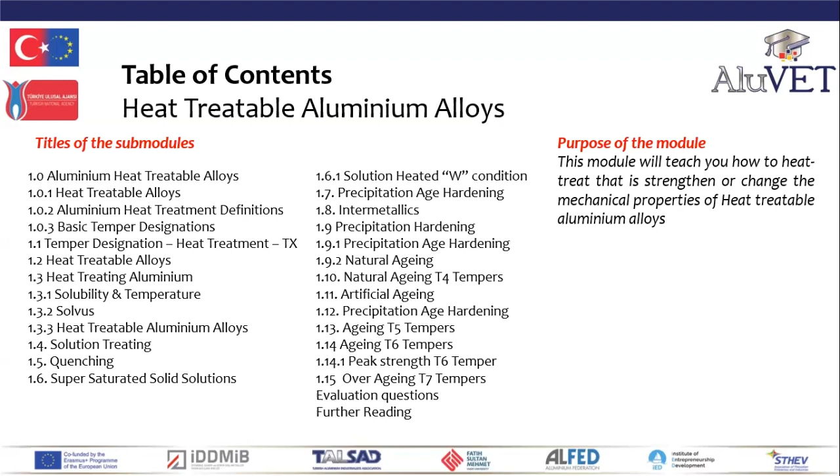This module will teach you how to heat treat, that is, strengthen or change the mechanical properties of heat treatable aluminium alloys. In this module, aluminium heat treatable alloys, you will learn which alloy series are heat treatable and about the different tempers. You will understand how to heat treat heat treatable aluminium alloys, how through heat treatment you can change the mechanical properties of heat treatable alloys.

You will gain an understanding, insight of the principles of age precipitation hardening. You will be able to specify the correct heat treatment to develop the required properties for your products. Now, please understand that this module uses very simplified explanations of solution treating and age or precipitation hardening. It is intended to provide sufficient understanding of how age hardening is carried out and its effects, rather than a full metallurgical explanation of the actual mechanisms.

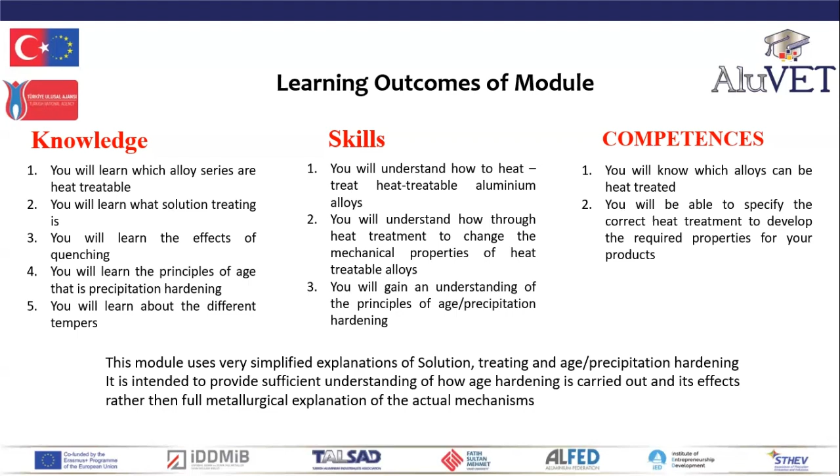Now, the 2000, the 6000, 7000, and some of the 8000 aluminium alloys can be heat treated or can be strengthened through heat treatment. Aluminium alloy heat treatment is called age hardening and/or precipitation hardening. The two have exactly the same meaning.

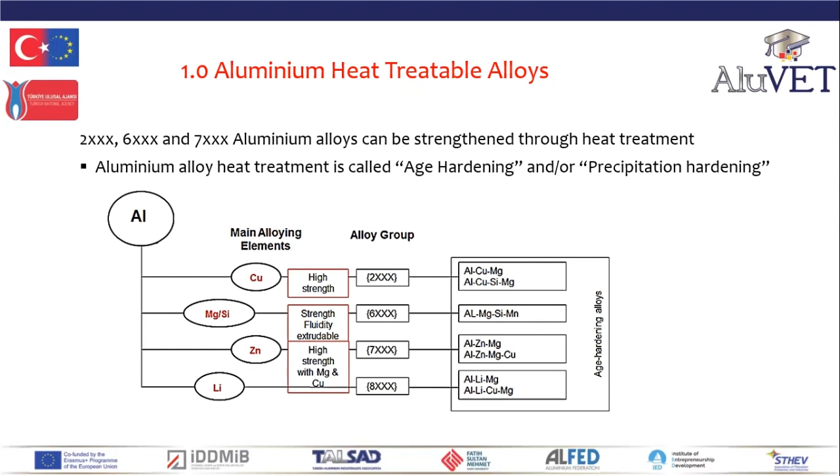In heat treatable aluminium alloys, alloying elements combine with aluminium during heat treatment to increase the strength of the alloys and change their properties. In the alloy series 2000, copper is the alloying element. Two elements combine in the 6000 series, magnesium and silicon, and zinc is the alloying element in the 7000 series. The 8000 series group use other elements, but mainly lithium and also tin.

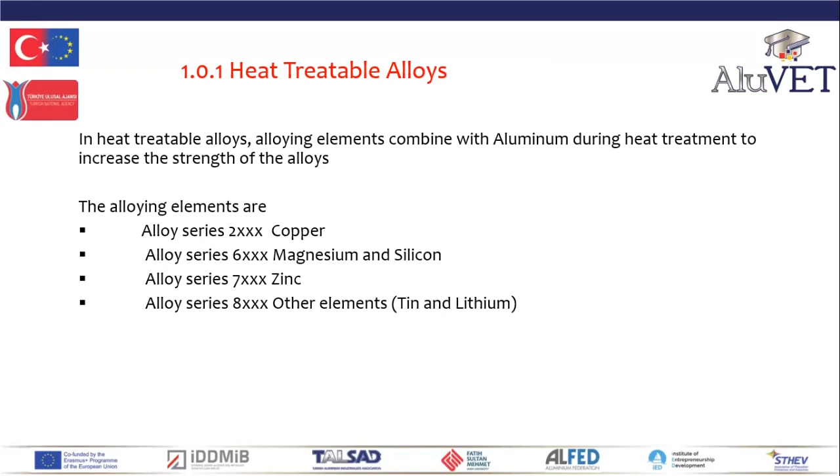European standard EN 515 describes all the possible heat treatments and methods of strengthening aluminium alloys. The different aluminium heat treatments are termed tempers. The European standard EN 515 lists all of the commercially available tempers and summarizes their methods of strengthening aluminium alloys. This standard EN 515 is applicable to all forms of wrought aluminium and aluminium alloys.

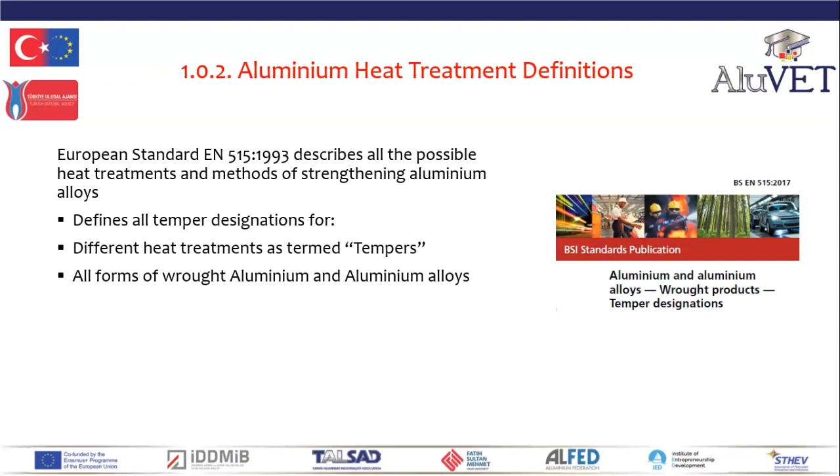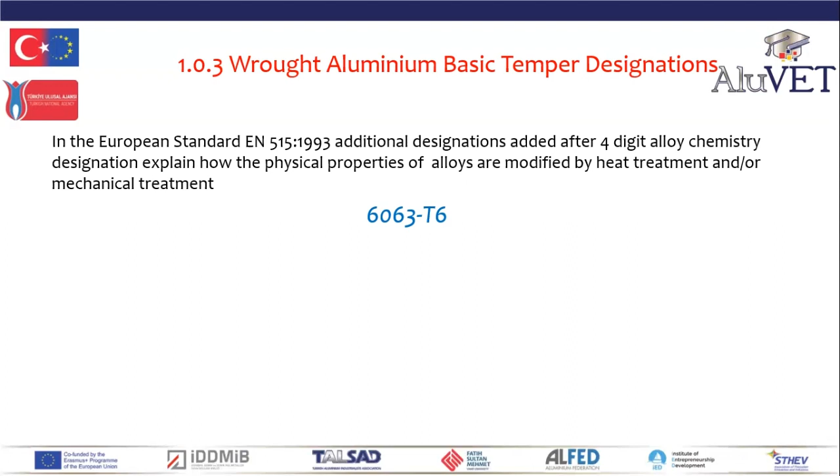In the European standard EN 515, additional designations are added after the 4-digit alloy chemistry designation to explain how the physical properties of wrought aluminium alloys are modified by heat treatment and/or mechanical treatment. 6063 is the chemical numerical designation. So we add the heat treatment letters and the numbers after the chemical designation. The first letter of the temper designation indicates the treatment used to produce the properties.

Letter F says this is as fabricated, so no heat treatment or strain hardening has been applied. Letter O says that this is in the annealed condition. The letter W says this is in the solution treated condition. This applies only to heat treatable alloys which have been solution treated. And finally, the letter T says these alloys have been heat treated. Now, this applies to alloys strengthened by heat treatment: the 2000 series, 6000 series, 7000 series, and some of the 8000 series only. Remember that the alloy series 1000, 3000, 4000 and 5000 cannot be heat treated.

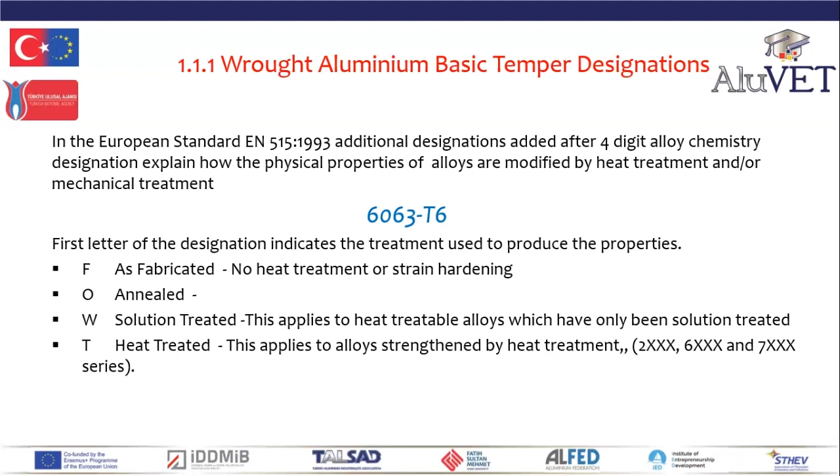The European standard EN 515 uses the letter T to indicate the heat treatment, followed by one or more digits, numbers. The second digit, a number, explains the actual heat treatment. The letter T followed by the number 1, so T1, indicates that the alloy was cooled from an elevated temperature shaping process and naturally aged. Similarly, the temper T3 indicates that the alloy was solution treated, cold worked, and naturally aged to a substantially stable condition. We shall explain the actual heat treatment in the following slides of this module.

So thus T4 was solution treated, naturally aged to a substantially stable condition. Tempers T1 to T4 are natural aging tempers. T5 and higher, so T5, T6, T7 and higher, are artificially aged. And again, we shall shortly explain. So T5 was cooled from an elevated temperature shaping process and then artificially aged. T6 was solution treated and then artificially aged. And T6 is the strongest temper, highest strength temper, and has the lowest ductility.

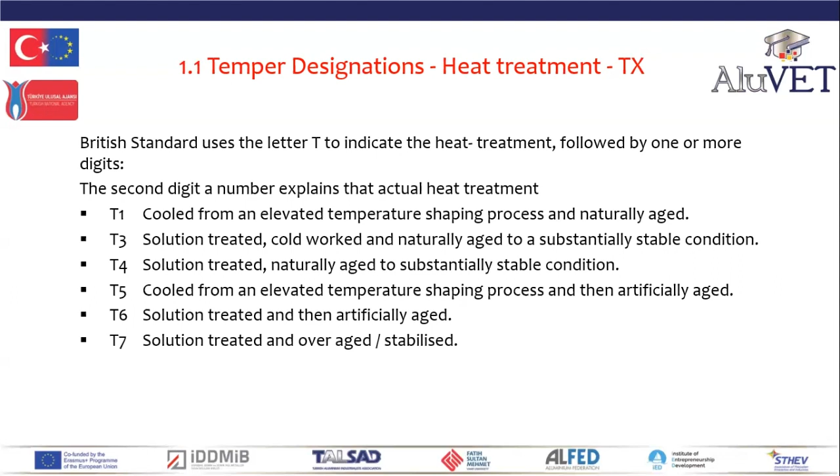So let's see how we heat treat alloys. Now, heat treatable alloys have limited solid solubility of their alloying elements. And in our examples, we shall consider copper. So this means as the alloys cool from the liquid state during solidification, during casting, to form solid solutions, the excess alloying elements, in our example copper, are pushed by the growing grains into the grain boundaries, as we saw in earlier modules.

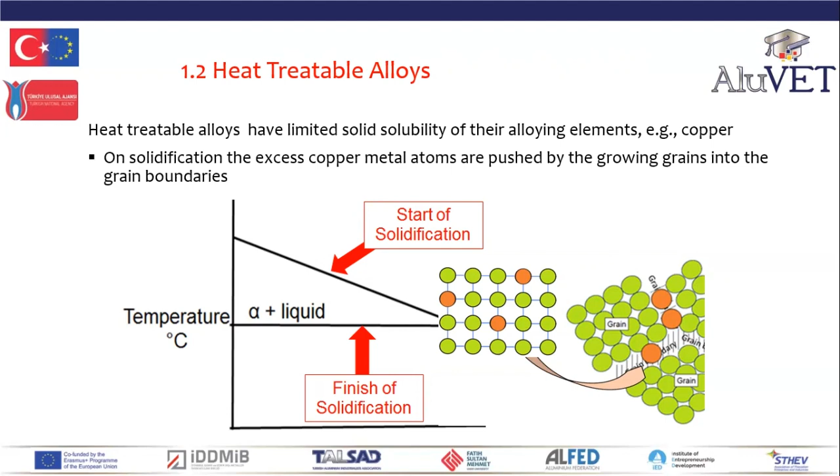In the normal state of heat treatable alloys, some of the alloying element atoms, for our example copper, exist within the aluminium grains, but the excess beyond the solid solubility limits are held within the grain boundaries. So in this schematic, we see that the copper atoms in excess of the solid solubility within the grains are actually seen in the grain boundaries. Now, such structures are weak and very ductile.

Just to clarify, in heat treatable alloys, the alloying elements beyond the solid solubility, that is beyond which the aluminium grains can naturally hold the alloying elements, are pushed during the solidification process into the grain boundaries. So the alloying elements in excess of the solid solubility are found in the grain boundaries. Such structures are weak and have good ductility.

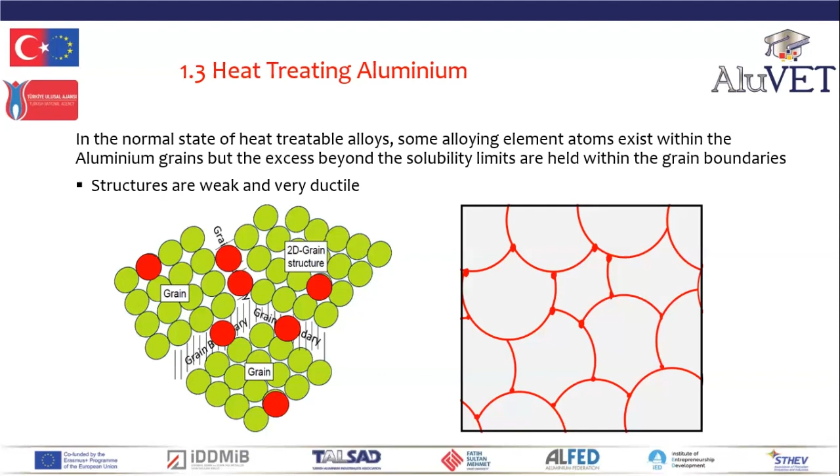Increasing the temperature expands the metal lattice, the spacing of the atoms, and so weakens the metallic bond, increasing both the diffusion rate and also the solubility of the solute alloying atoms, as we've seen in previous modules. The solute alloying atoms now can diffuse from within the grain boundaries into the aluminium grains. They are taken into solid solution out of the grain boundaries.

So during heat treatment of 2000, 6000 and 7000 series, we increase the temperature of the aluminium to a point where the solid solubility of the aluminium grains increases and the alloying atoms diffuse out of the grain boundaries into the grain.